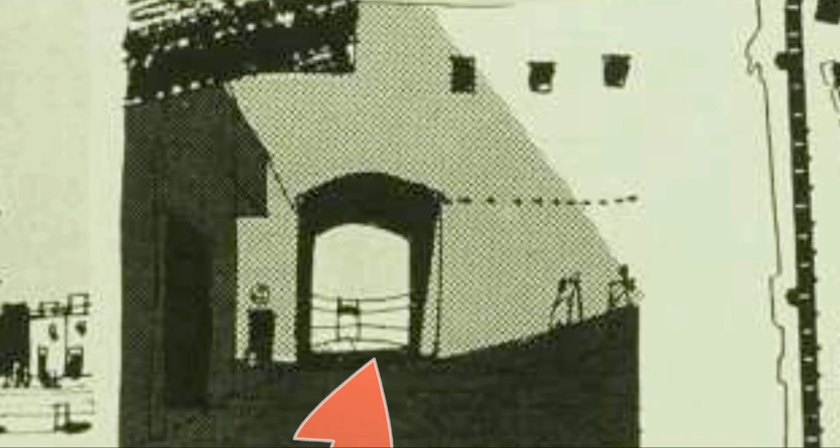It pulls us through. If anybody's ever been to Venice, this is exactly the kind of experience you get in Venice. When I first went there, I didn't come out of the hotel for half an hour. I was convinced I was going to get lost. It didn't take very long to realise that you actually navigate by spaces, and each space is connected by a series of almost alleyways, narrow streets. And after a while, you build up a mental map of spaces, and you don't really get the detail of the things that link them together. You memorise the spaces. And that's what's going on here in terms of serial vision. Here we go again. We go through another pinch point, and we're into another bigger space.

We go through that space, and then we're into kind of infinity and beyond. I'm actually starting to use some of the terms that Gordon Cullen coins in his book. So it's infinity, openness, here, there, narrows, widens. So that's the notion of serial vision.

So when we're creating a new piece of town, as we do as urban designers, or as we're building a new piece of town, as you do as developers, we need to actually think about how we create a place that's got a really great experience, because that is going to pull in customers, that's going to pull in clients.

Let's look at some of Gordon Cullen's concepts of describing place. We'll look at some of the main ones, we won't do all of them. You will find on your Moodle site, those that are doing this module through Oxford Brookes, a glossary of Cullen terms put together by one of our ex-MSc spatial planning students, Kirsten Gray, where she identifies and describes each of these concepts and more.

So let's go back to that drawing we looked at earlier and put some more labels on. So these are Cullen's labels now: openness, enclosure, here, there. All right. The openness, in contrast to that enclosed space, creates that concept of standing here and there's something being over there, that notion of movement, dynamic and visual interest.

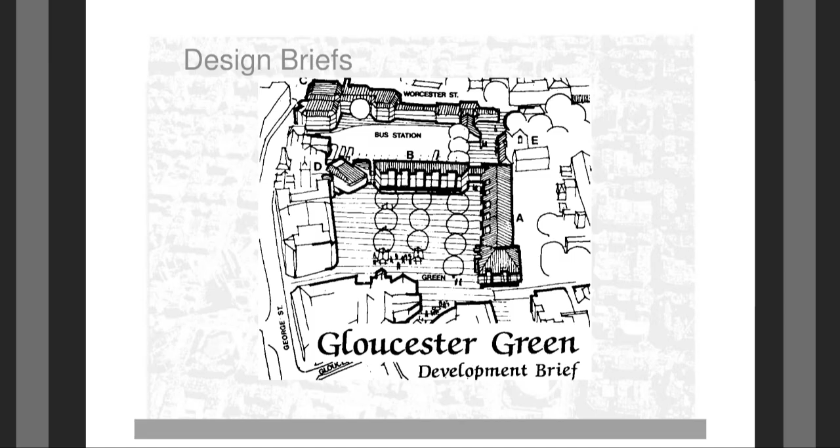And this is what it looks like. Again, a bit like when we looked at Woodstock, there's not an awful lot there that can be measured in terms of a kind of regular 1, 2 or 3 dimensions. There's a texture to the place, there's an irregularity, kind of wiggliness. And we can start to identify Cullen-esque concepts when we look at this image.

So, in the foreground, we've got our here, where we're standing, where we're viewing. We look through, there's the pinch point, there's the arch, the entrance through the bus station. The bus station becomes a there space. We've got openness in the foreground, we've got an enclosure, and then we've got openness again. The trees on the left hand side create what Cullen would describe as a screened vista.

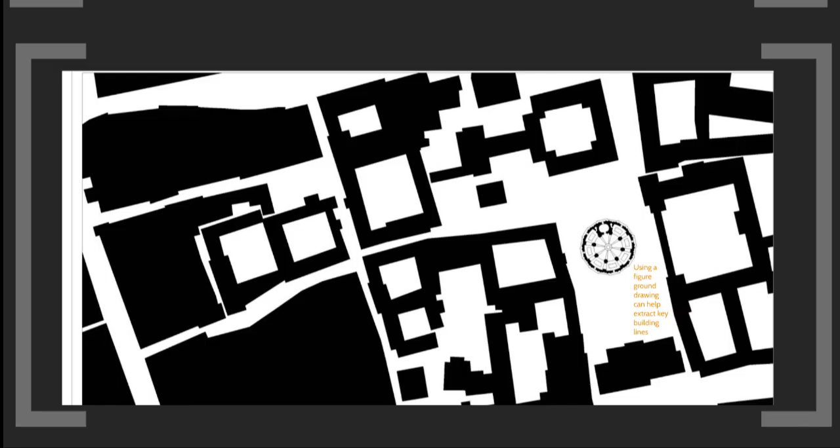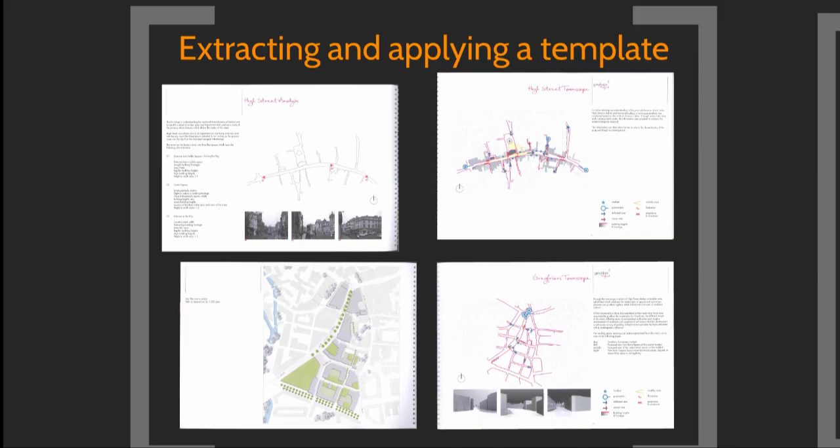If you wanted to create that feel of space, enclosure, of difference from here and there, enclosure, openness, you can trace this off, you can measure it, you can replicate it, you can use it as a base map to create somewhere new. Which is exactly what one of our MA students did a few years ago when creating a new area of Oxford called Greyfriars. And he wanted to use the DNA and character of the High to create something recognisable as being of Oxford, but not a total copy.

So he starts by doing an analysis of the High, taking a visual analysis in terms of certain buildings and realising that the whole of the High is actually on a curve, which means you get a series of deflected vistas. You look down the High, you'll see projection, recession, fluctuation of the building line, incidents, landmarks, screened vistas. It's a really good example of how all those townscape concepts can come together.

This is an analysis of the High in Oxford, looking at the positions of incidents, of punctuation, of deflected vistas, of closed vistas, looking at visibility cones, the fluctuation of building lines, and major projections and recessions. So this is still getting to understand the place, with the intention of taking some of this information and starting to turn it into a design.

And here is this design, this new street, Greyfriars in Oxford. It's the area that is now down by the new Westgate Centre. But if we look at the map, the plan, we'll see, using those same symbols, how the designer has tried to replicate certain features of the High, but without completely copying the High.

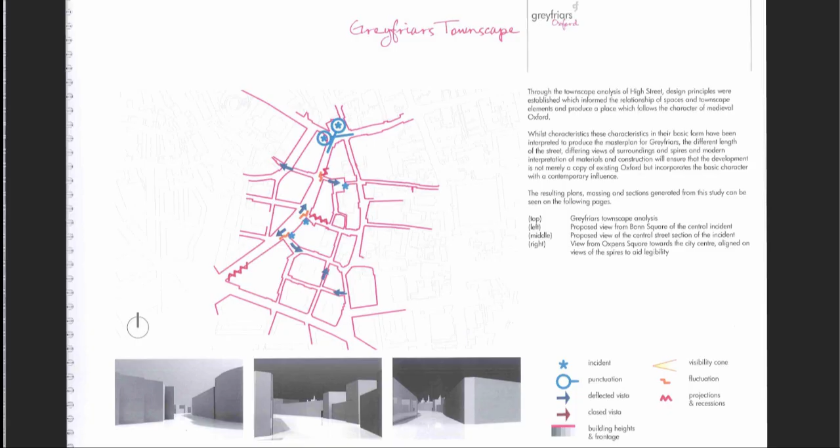It's not about copying all the historical detail, it's about taking out the relationships between buildings and space to create, as three-dimensional models, a place that's got the feel of the High, but is not an exact copy, and yet it would create that same level of interest and intrigue as you move through the place. So how do we use this? How do we use this notion of Cullen's concepts and deliver embedded large-scale structural interest and richness?

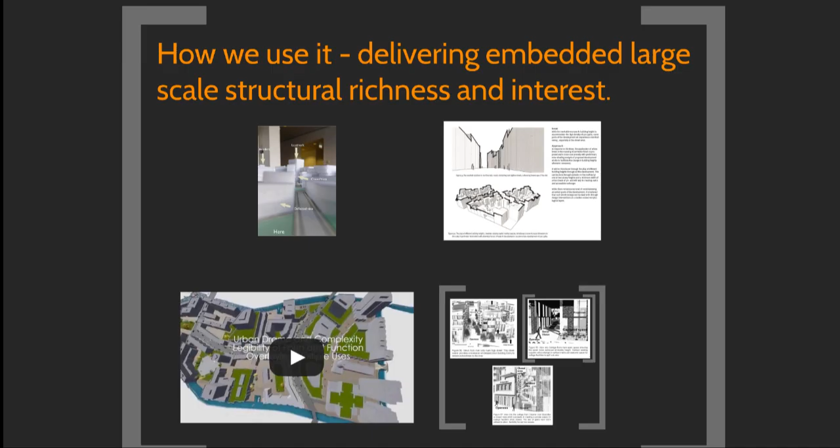Some of the things we do when we're starting to put together a design package is to just do some simple 3D modelling and drop our camera down into what would be a streetscape and use our Cullen-esque labels to actually describe what we're seeing. If you like, drop ourselves into that space. And using bits of foam board like this, or small wooden blocks, allows us to move things, modelling an increased townscape texture, or decreased townscape texture.

And this image shows us that notion of, think of places as a stage set where you're designing the foreground, the midground and the background, and you've got that depth of scenery. So this is not unlike that photograph I showed you of Petergate in York, where the landmark there was the Minster, the cathedral sitting in the background.

We can use three-dimensional renders, things produced in SketchUp or CityCAD, and then if you've got the skills, you render them in 3D Studio Max, and then you do the same thing again. You use Cullen's labels to describe what you're seeing. And if at first you can only put on 2 labels, then you must be designing a really bloody boring place. So let's go back and change it.

Let's open up some spaces. Let's create some pinch points. Let's put in some deflected vistas. Let's actually create some projection and some recession. Let's create some captured spaces.

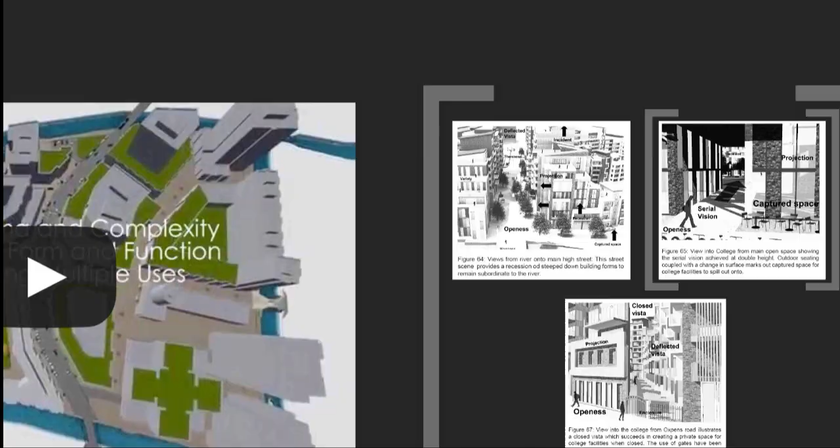I'll start the video and then I'll fast forward it. It's 15 minutes long. We need to start at minute 9, but you can watch the full thing in your own time, perhaps have a cup of coffee. So let's just zoom through there and start the video and then I'll move it on.

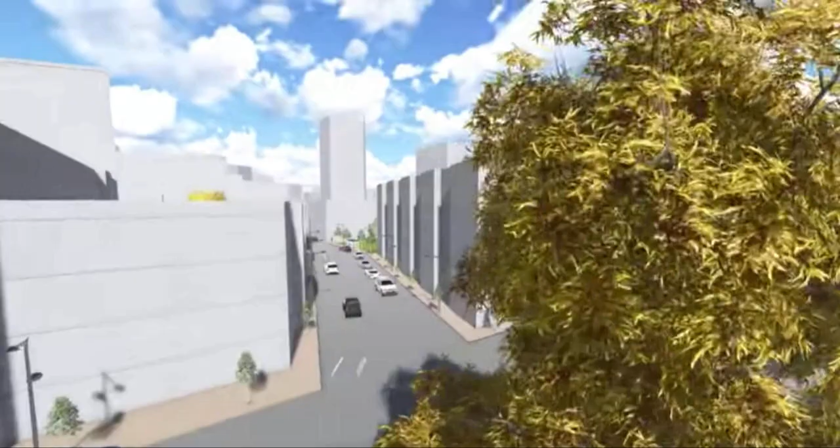Gordon Cullen introduces the concept of serial visions and stated that variations to physical elements can change perceptions and feelings. Cullen also suggested that although the user may walk through a town at a uniform pace, the place should incorporate a series of events and related spaces to create a sense of journey and discovery in the urban environment. This run-through shows the changes of experience that can be seen along the new Icknield High Street from the Icknield Port Road. Some of the serial vision elements that can be found in this proposed master plan of Icknield Port Loop are:

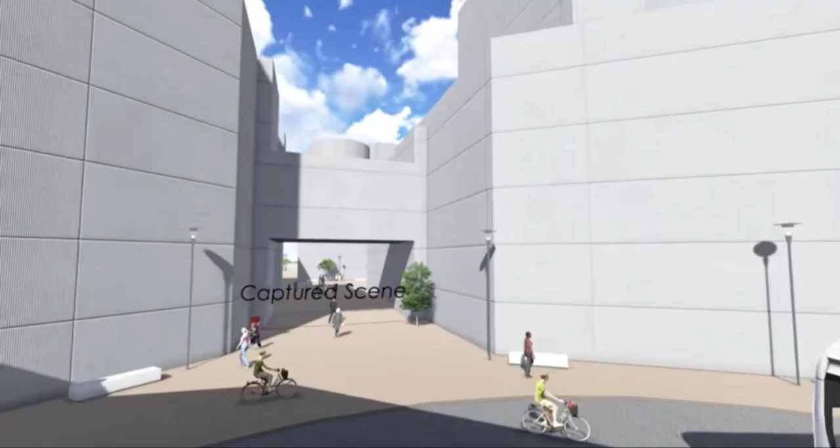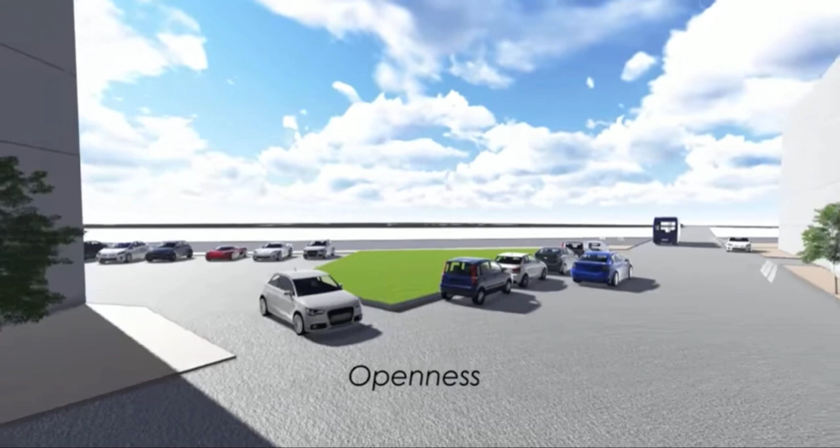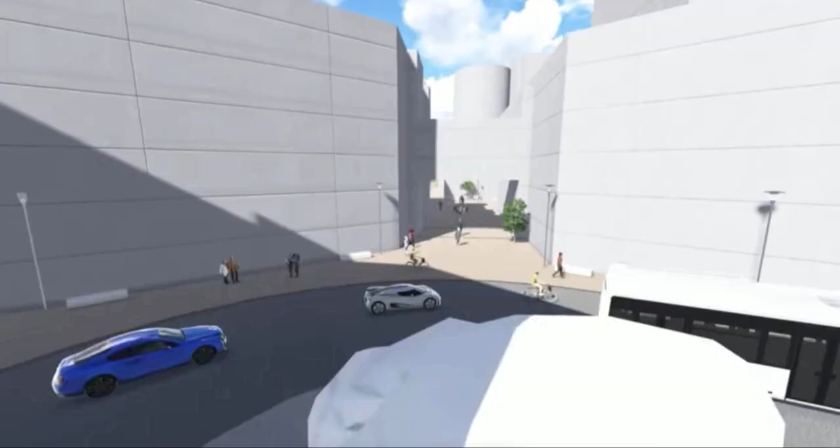The final strategy to a well-delivered townscape design is streetscape and sensory richness. Lynch suggested that the journey through the city should project to all human senses. Recognition of nature and location of sources by taste and smell will trigger memory of emotional response, which gives character to a townscape.

So a slightly abrupt end to the video, but I think you get the message in terms of trying to deliver a variety of experiences as you go through a place. So although as urban designers, planners, developers, if we're doing an urban design course, we'll be taught that connected streets is a really good way of delivering development. It's actually very easy to create something that would tick lots of urban design boxes, but actually visually would be extremely dull. Use the Townscape approach to actually make sure that your designs, or any design that you're involved with in future, creates a variety of experiences and is not seen as a dull development.

Let's just summarise what we've looked at. Everything's predicated on the idea that we're creating walking cities, and Townscape is developed on an older walking city morphology with face-to-face contact and pedestrian time and motion. So it's very relevant to creating walkable places, which is super important these days if we're trying to reduce the need for people to use fossil fuels and get people out of cars.